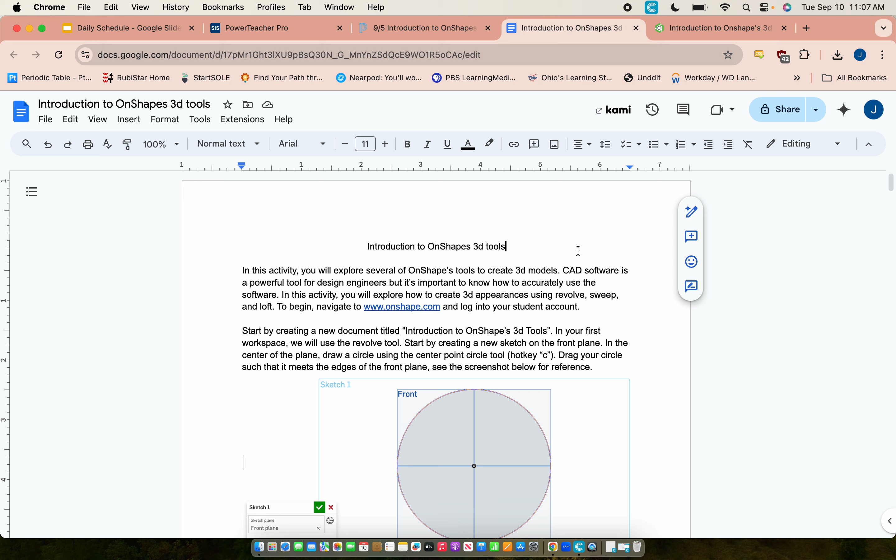In order to do this, we must first go to onshape.com and create a document and title it Introduction to Onshape's 3D Tools.

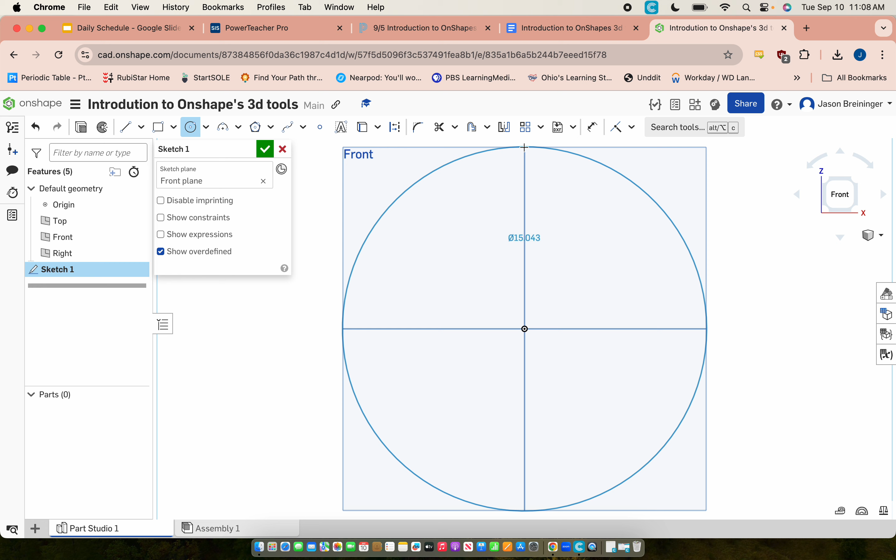When my workspace loads, I will begin by creating a sketch on my front plane. I want to view my front plane straight on, so I will click on the front plane icon on my view cube. I will then select my center point circle and start at the origin, the center dot in the middle of my screen. I will click and drag my cursor to approximately fill the entirety of the front plane.

I will click again to confirm my circle. Next, I will make a line that cuts down the center of my circle. Notice this yellow line appears when I am vertical to my origin, and that tells me that this will cut my circle in half.

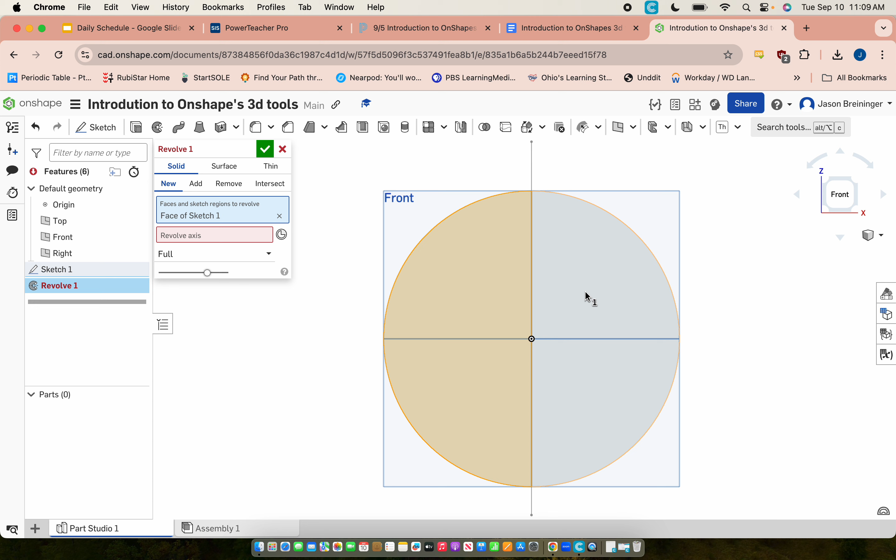When I am done, I can hit revolve, and it's going to ask me 2 things: what do you want to revolve, and where do you want to revolve it around? Instead of highlighting the entire circle, I'm going to deselect one side. Next, I will click on my revolve axis, and my revolve axis will be my line down the middle. When I am through with that, I will click check, and I can see that now I have a sphere.

You can screenshot this and put this where it asks you to create your work.

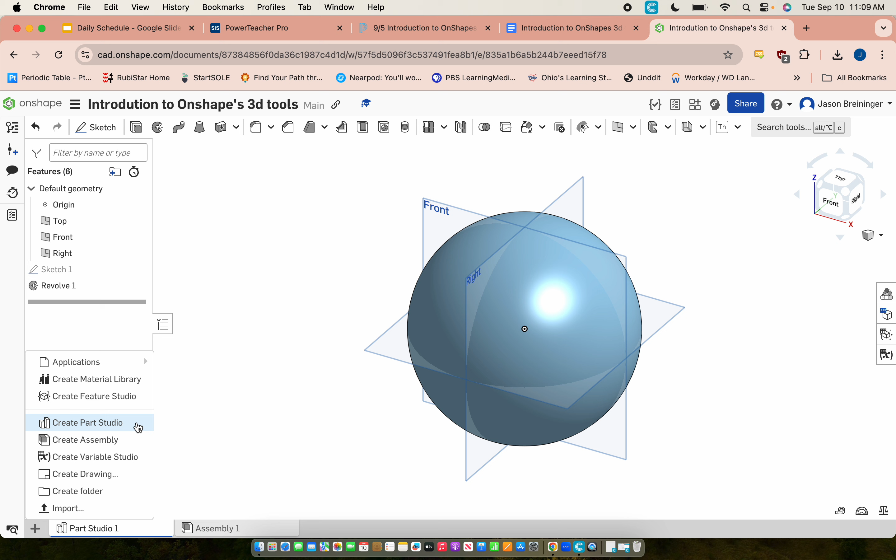At the bottom of our screen, I will now insert a new tab, and I will create a part studio. Again, I will start a sketch.

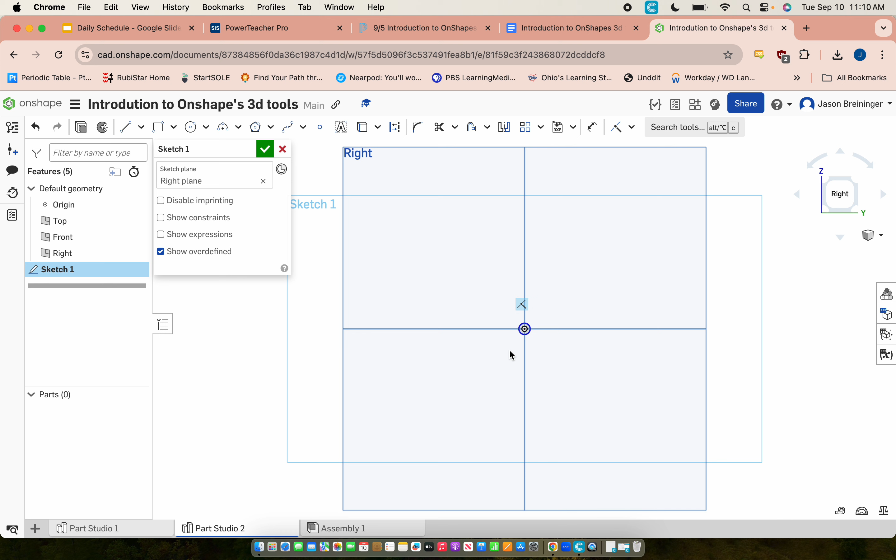This time, I will start it on the right plane. I will, in my view cube, hit the right plane, so I'm viewing normal, and I will start by sketching a small circle in the center of my plane. Truthfully, it does not matter how large you make this circle. I chose to make it very small. I'm not going to bother putting in dimensions. I will confirm the sketch.

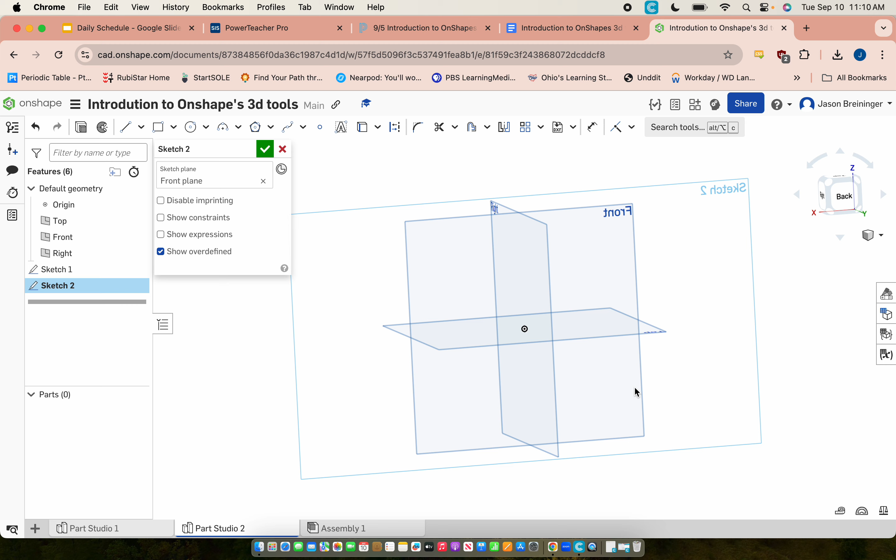Next, I will go back to my isometric view. I will hit sketch, and this time I will select my front plane. To view my front plane normal, I will right click and select View Normal to Sketch Plane. Now, you're going to notice that my front plane, I'm viewing the back of it. If I want to choose to view the front, I can just click that button again, and Onshape will see that I want to view it from the front.

I'm going to start with a line at the origin and arbitrarily make it about this long. Next, I will grab my 3-point arc tool from the top toolbar. I will click at the end of my previous line, drag down slightly, and set my radius. My radius makes a perfect semicircle when I drag it to the point that these 3 points are vertical to each other. I can now click, and I have my arc confirmed.

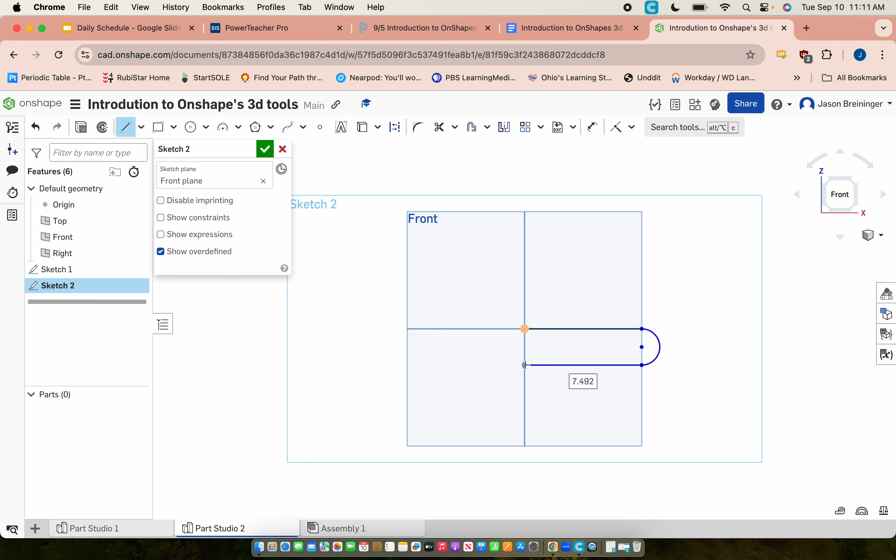I will finish this shape by drawing a line that connects this point to about here. When I'm done, I can just simply hit check, and I have my sketch profile.

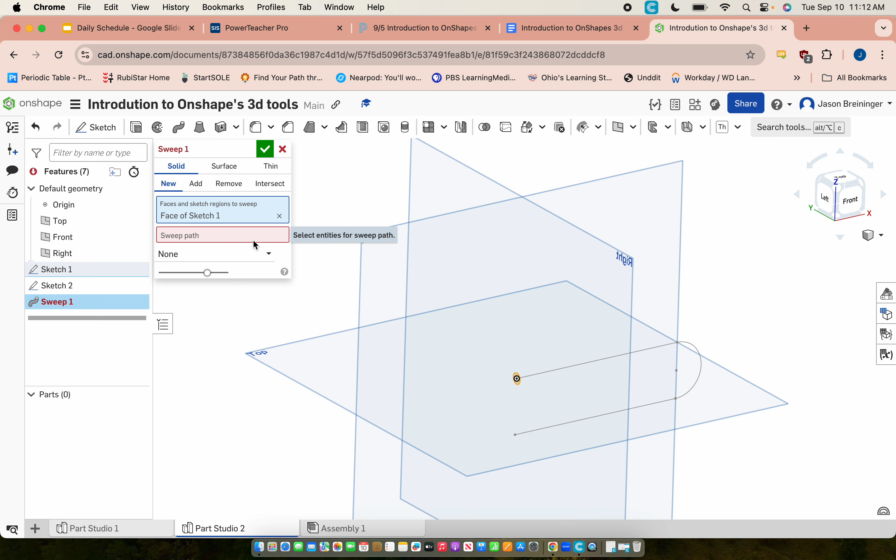I will choose sweep from the top of my toolbar, and essentially what sweep does is it takes a sketch profile and drags it along a second sketch profile. So I need to make 2 selections: what do I want to sweep and where do I want to sweep it around. Make sure that you're choosing solid to create your sweep. The thing that I want to sweep is the circle, and where I want to sweep it around is the sketch profile I've just created.

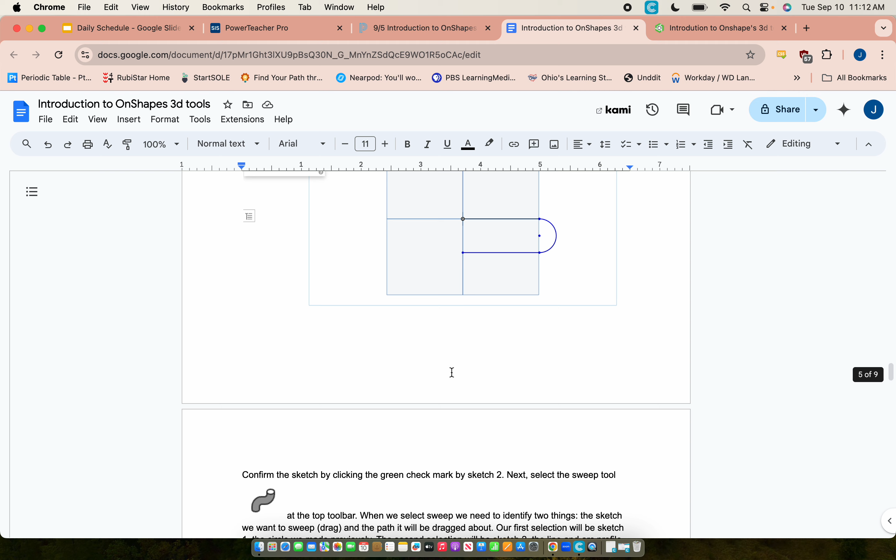I can hit check, and now I have this, what almost looks like to be a sound fork, a tuning fork. At this point, I can go back to my isometric view, I can take a screenshot, and I can submit it where it asked me to, which is right below here.

Again, I will insert a new tab, and I will create a part studio. In this final shape...

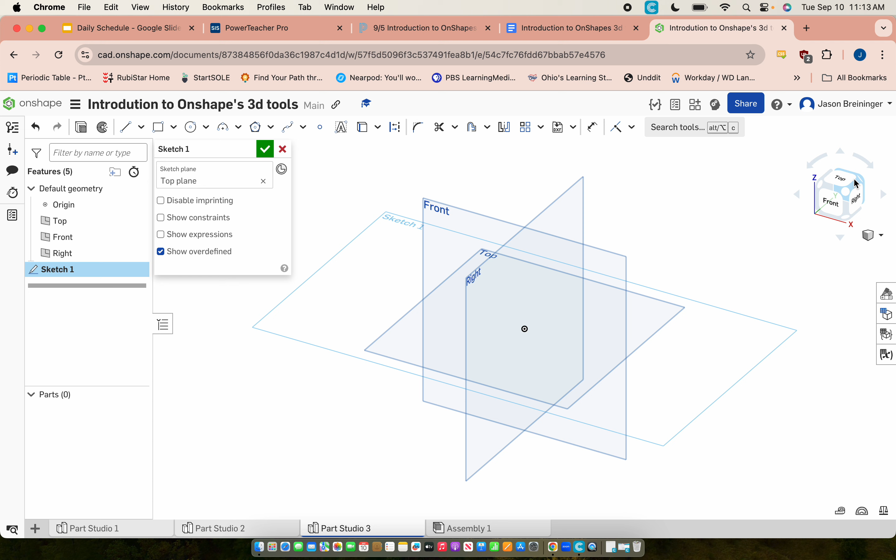I will choose sketch, and I will choose my top plane. In my viewfinder, I can click on top so that I'm facing directly down at it.

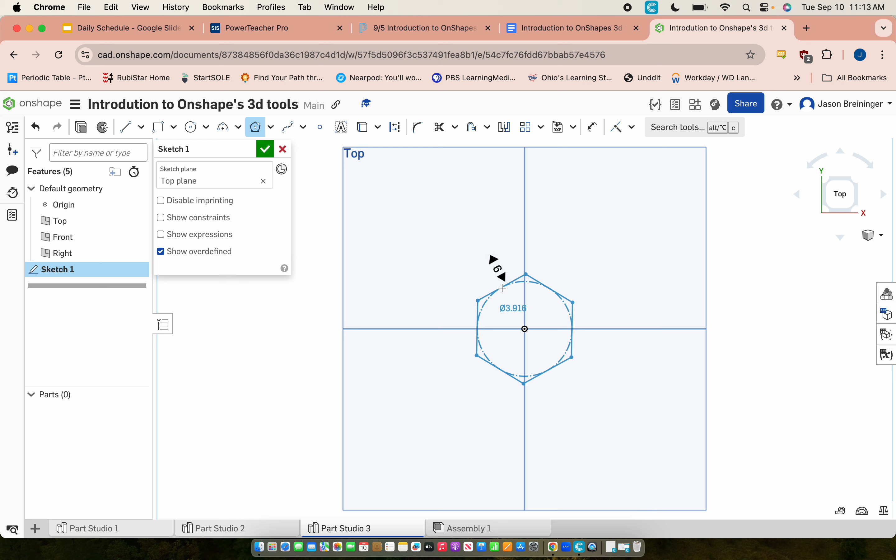What I ask you guys to do here is to choose the polygon tool. My polygon tool allows me to easily make a variety of polygons, and it defaults to a hexagon. All you need to do is click, drag it as far as you'd like to make it, and click again, then hit enter.

Next, I will select extrude from the top toolbar. I will extrude this a depth of 5 centimeters. I will click check, and my shape is done.

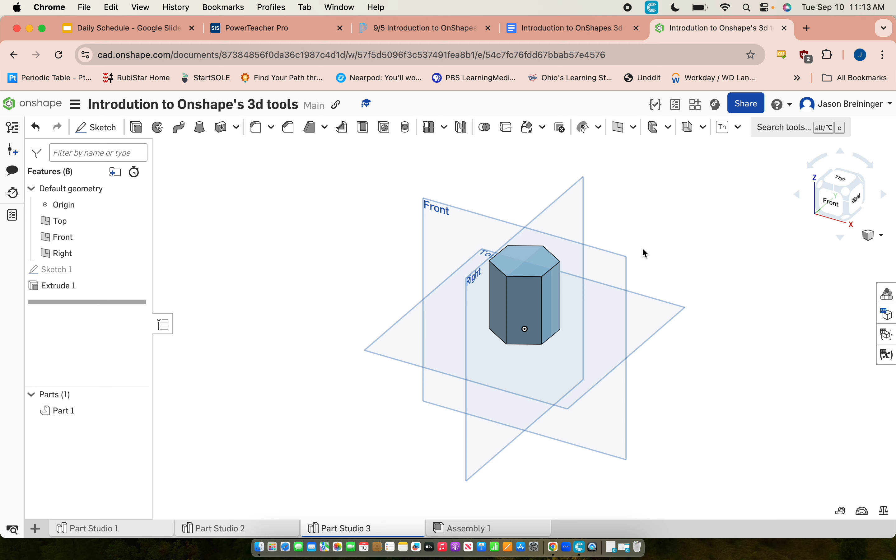At this point, I can go back to my isometric view, and I can take a screenshot and submit it below here.

I hope this helps you with completing this assignment.